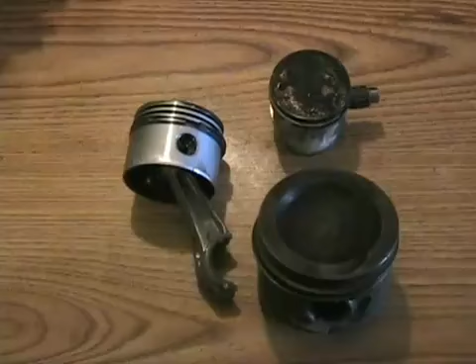How pistons work. There's a lot of engineering that goes into pistons, and design in cylinders that I'm going to show you now. The most common kind of piston, like this lawnmower engine piston and like in most cars, is just the flat top piston.

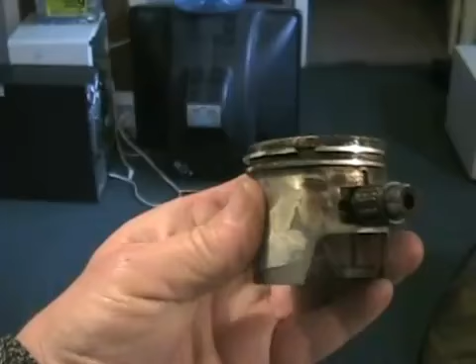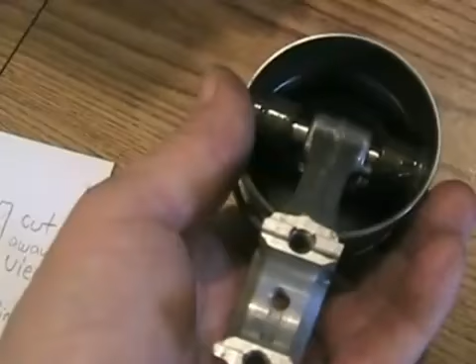Here's a two-stroke flat top piston. The difference is it's got 2 rings, and 4-stroke pistons have 3 rings. This one's the oil wiping ring that keeps the engine from burning too much oil, and it wipes the cylinder wall and sends the excess oil back through holes behind the ring. If you look closely when I move this, there's drain-away holes behind this ring that allow the oil to run back inside the piston and go back into the crankcase.

This is called the recessed piston. It also has pre-made valve clearance into it. This valve clearance may not be necessary for the engine it's in, but some engines are designed so you can put a higher lift camshaft in them, which opens the valves more. This just makes it so you don't have to take the engine all apart and change the pistons. You can just change the camshaft, and your piston will still not interfere and hit your valves.

These kind of pistons are generally used on turbo engines because they lower the compression ratio. This one's 4-stroke also. I don't have enough old pistons laying around here to show you every type, so I made a drawing of the other types.

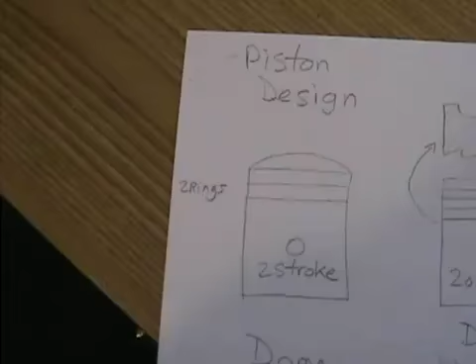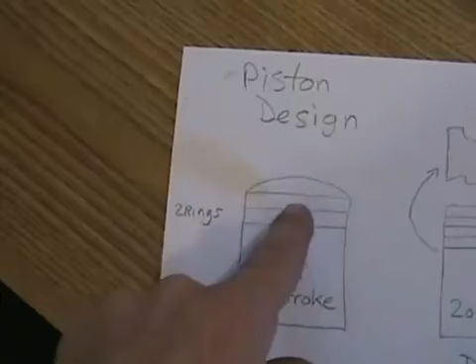Next is a very common one on snowmobiles and dirt bikes. It's called the dome top. It's got 2 rings, this is for a 2-stroke. They're very strong because 2-strokes run at high RPMs and often have very high crown temperatures. The top of the piston is called the crown, and the dome makes them stronger.

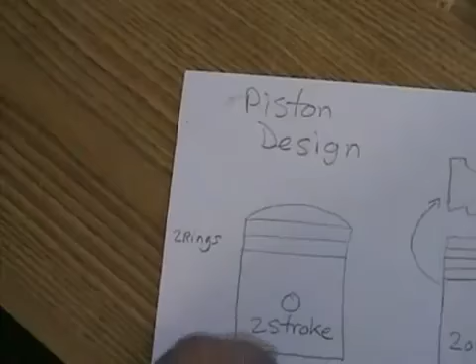Also, 2-strokes don't have any valves in the head, so they very often have a hemispherical head, which is a great design to propagate a shock wave to push a piston down. So you make a better piston, one with a dome to fit in that space.

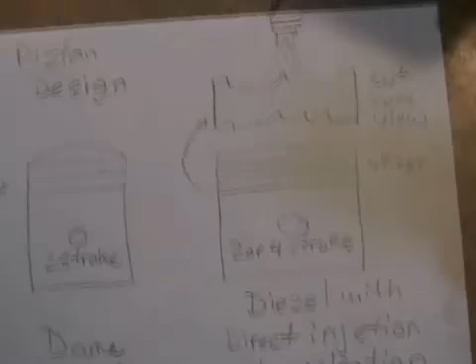Also there's the 4-stroke diesel with a nucleation point and direct injection. So the side view of the piston would look like this. There'd be probably 3 or 4 compression rings and 1 oil scraper ring.

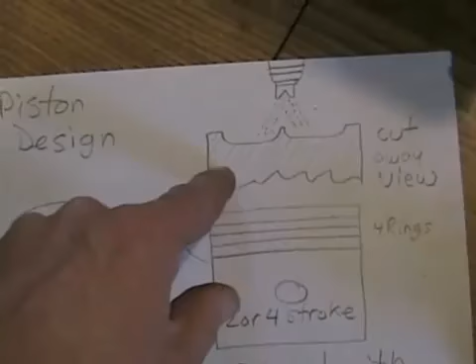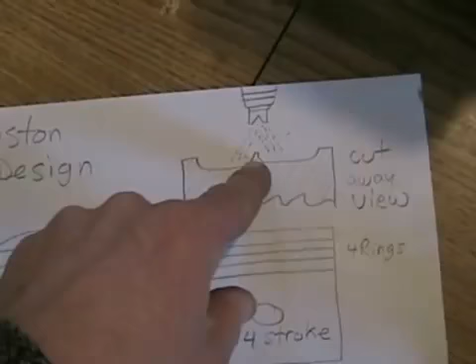If you cut the piston in half down this way, the top of the piston, the crown, would look like this. It would have undercuts, because many diesels have a flat cylinder head with no relief for the compression ratio. And this little peak that points up in the middle of the piston, the same height as the top, and the direct injector would sit right above it.

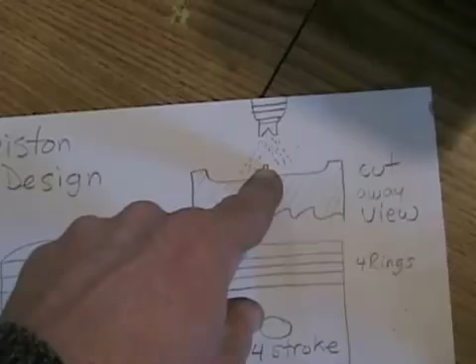This gives a little point that runs a little bit hotter than the rest of the piston. It also just gives something like the dirt on the edge of a champagne glass, a point where the flame would like to start and propagate, where the explosion would begin - a nucleation point.

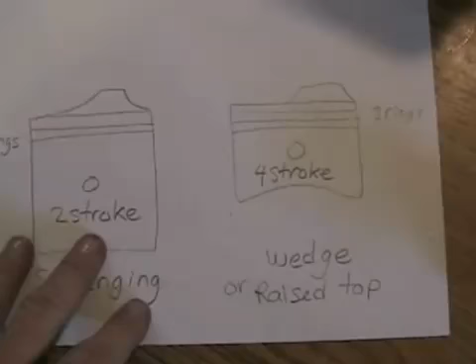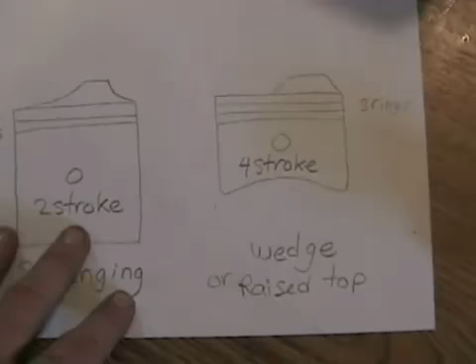If you're modifying your 4-stroke car engine, usually V8s, and you have the older style with a typical cylinder head that's not designed for high compression, but you don't want to buy expensive cylinder heads and you want higher compression in your engine, then you can get the wedge or raised top piston.

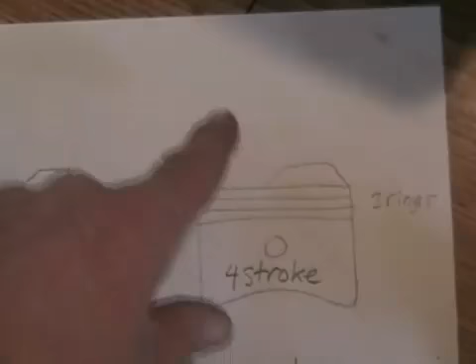This is common in small block Chevys with large combustion chambers, and it's just got a raised bump on the top on one side. This side's lowered to make clearance for the valves when they're opening, and that increases your compression ratio.

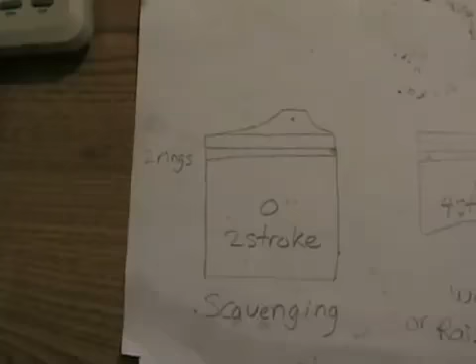On 2-stroke engines, when you want low RPM torque and good fuel economy, like in small motorboat engines that are 2-stroke, this is called the scavenging piston. It has a wedge shape on it with a curve here and a gentle slope here. This is the exhaust side, and this slope is designed so the exhaust can shoot out very easily, and the intake has to shoot up above it and allow the exhaust to come out uninterfered, not mixing the 2 gases together.

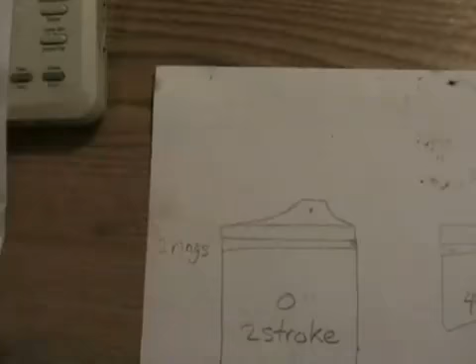One more thing I forgot to mention is that many modern 2-stroke high revving dirt bikes actually only have 1 compression ring. A boat engine would actually have 2.

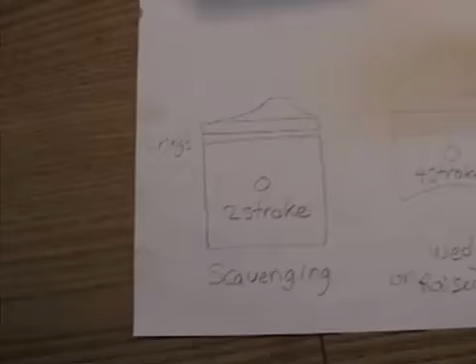Now all pistons have rings, and on most 2-stroke engines they have a little tiny dowel pin, like you can see right there, and then a little groove in each side of the ring to line up the ring when you're reassembling them.

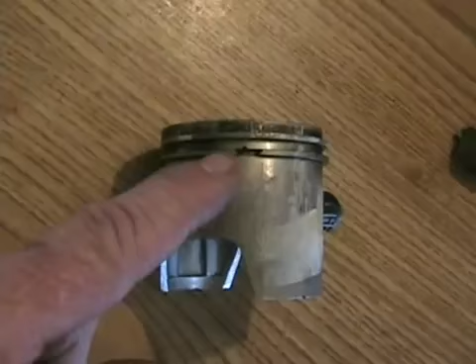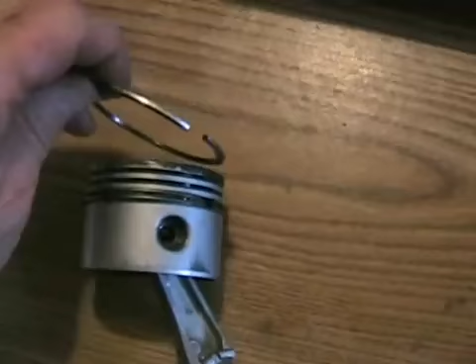Always make sure when you're working on a 2-stroke that when you're trying to put the piston back into the cylinder, you have the gap of the rings where the dowel pin is, or you'll destroy the rings and even push in that dowel pin trying to squeeze them into the cylinder if they're not lined up. On 4-stroke engines, the rings can spin around and go anyplace they want, but even when the engine is all assembled and running, the rings usually stay in pretty much the same place, so they don't need those dowel pins.

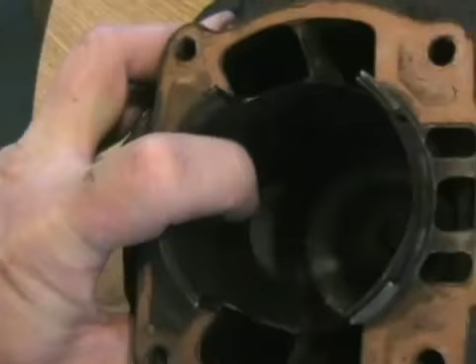The reason why 2-strokes have dowel pins is because they have ports inside their cylinder walls, like you can see there, to let the exhaust gases out and the intake gases in, and you don't want the ring opening up and expanding and getting the corner of it caught in one of those ports, snapping the ring off.

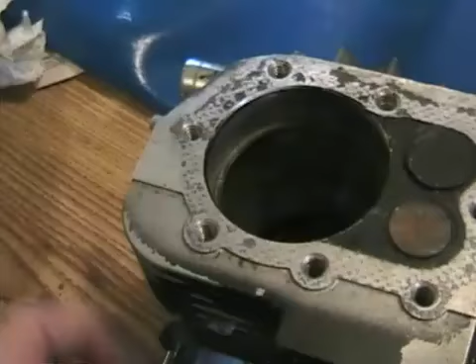4-strokes always have smooth cylinders all the way down, no holes, because they breathe through their exhaust and intake valves. Now you do want to line up the gaps on the rings on a 4-stroke engine in a certain way.

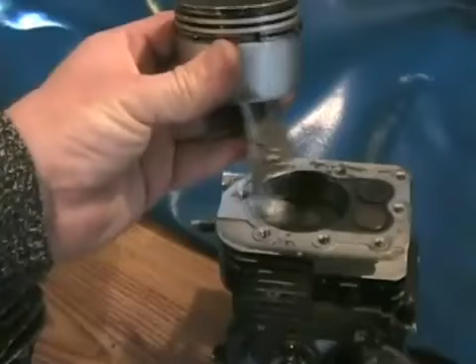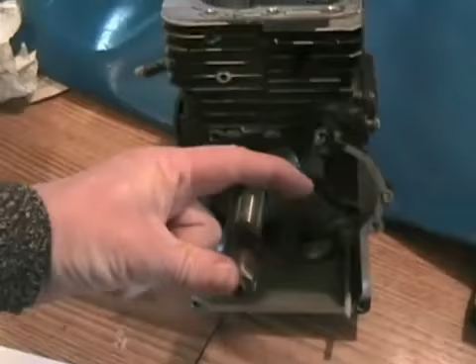For example, this piston went in the engine this way, and when the crank was turning on its downstroke for its power stroke, the crank had the rod pushed that way, so the crank was turning in this direction as the piston was going down. Then this side would be called the thrust side of the cylinder, since the engine was rotating that way. Well, you don't want your ring gap on the thrust side because it's pushing harder on that side, and the little corners might gouge the cylinder wall a bit.

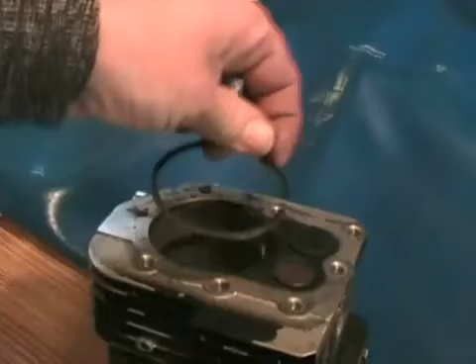So when you install the rings, you install one at that position, one at that position, and the oil ring at another position over here. You never want to have all three ring gaps all in line, because that would cause a compression loss.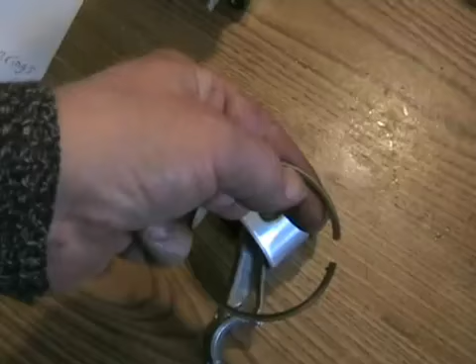When reinstalling new rings or putting the same rings back on the piston, one might have what looks like a chrome band around the outside edge. If you're not sure if only one ring has a chrome band and the other doesn't, the chrome band one always goes on top. If one ring looks like it's just dark cast iron and the other rings look shiny, the dark cast iron one will generally go in the middle.

There are two very common designs of oil scraper rings. This is the 3-piece model, and this is the 1-piece model. This has two raised high points with thin edges to scrape oil and purge it back through those holes—there you can see the little drain-away holes. This design is not as good; they seem to burn more oil when the engine gets higher miles on them because they wear out quicker.

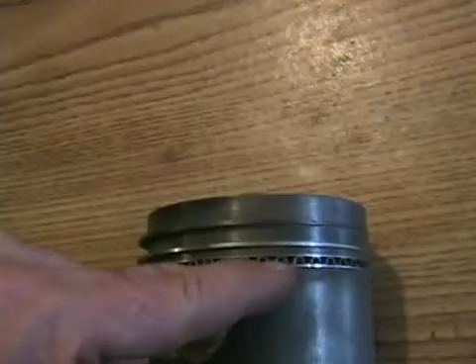The 3-piece design oil ring is much better for long life and less oil burning. It has this corrugated part which you install first, then two very thin chrome rings—you install one at the top, one at the bottom, and they sit in two little grooves. The corrugated part actually acts like a spring, helping keep those oil rings spread apart. They last a very long time and have low oil consumption.

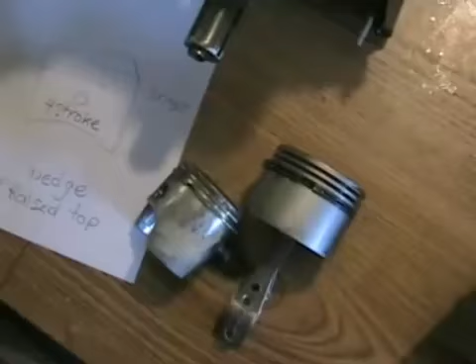Whenever you put new or used rings in a cylinder they didn't come from, the first thing you do before putting them on the piston is squeeze each one and put it in the cylinder. Then take the piston with no rings on it and shove them down part way. It's best to shove them close to the bottom on a worn cylinder, where it's narrower because there's less wear. I've got this one just shoved down far enough for demonstration purposes so I can still film it, but you'll see the tiny little gap.

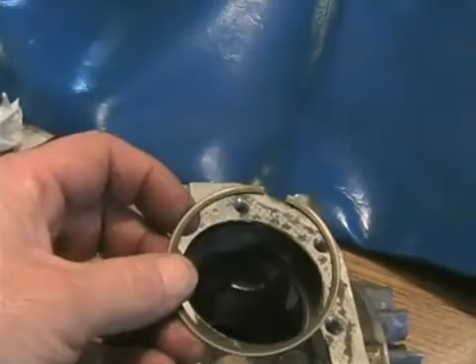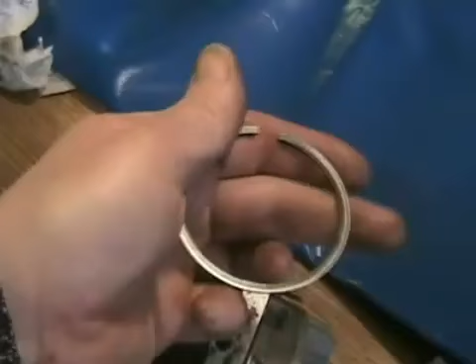The gap should only be between 4 thousandths to 10 thousandths of an inch wide, most often around 4 to 5 thousandths, like the thickness of 2 pieces of paper. If there's no gap in your ring when it's in the cylinder, then when the engine heats up to operating temperature, the ring will buckle as it tries to expand with nowhere to go, and the buckling will cause cylinder gouges, like scoring, damaging your engine permanently. If there's too much gap, you lose compression, and generally you can see your rings are worn out and not even thickness all the way around—this means it's time to change your rings.